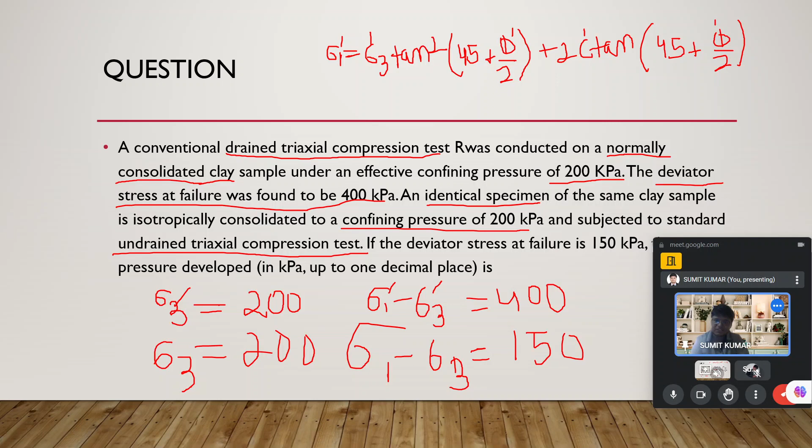In the meanwhile, I will first start with a quick introduction of the lecture we went across during the last session, and afterward we will start with the new content I have prepared for you. So in the last class, what we studied: we solved a problem based on the triaxial test, and it was a very good problem. We solved two problems, which you must have understood.

If anyone doesn't understand, you can ask me at the end, or maybe in the chat box. I will communicate at the end of this session.

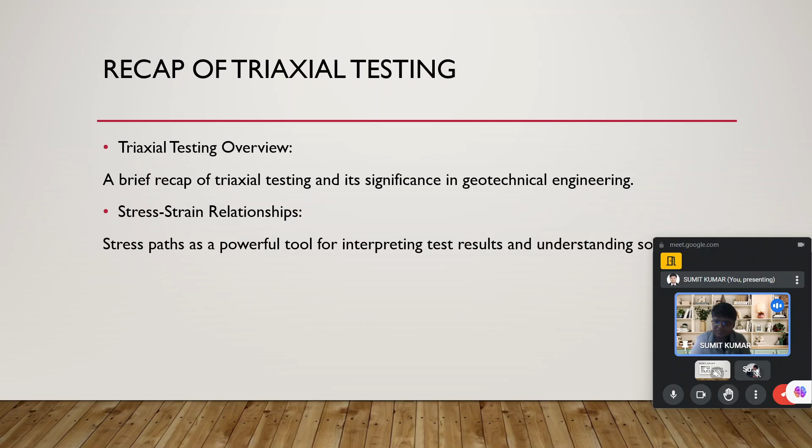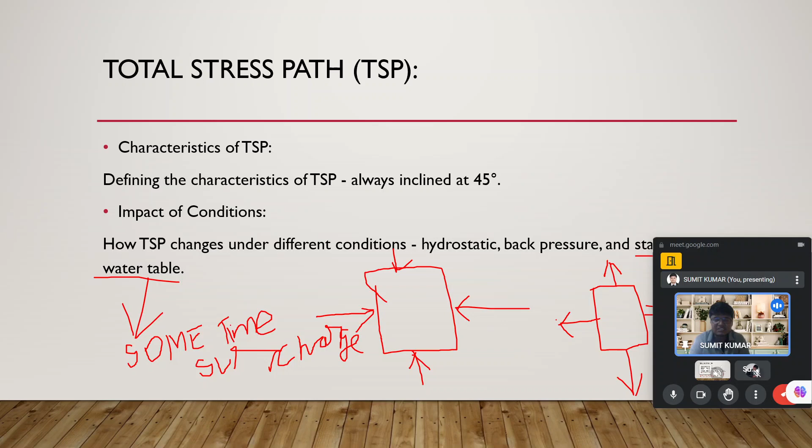So we have understood the total stress path, effective stress path, and what is meant by total stress minus static pore water pressure, and how we achieve those considerations, which we studied during the previous classes. Apart from that, we reviewed the triaxial test - a brief description of how the triaxial test is performed - which we also went across during the last session, along with the mathematical insights, like the interrelation between these factors which differentiate between the total stress and the effective stress path, taken into account during that session.

The nonlinear behavior of the effective stress path, and how it is connecting with the shear failure, by understanding the path that leads to the shear failure.

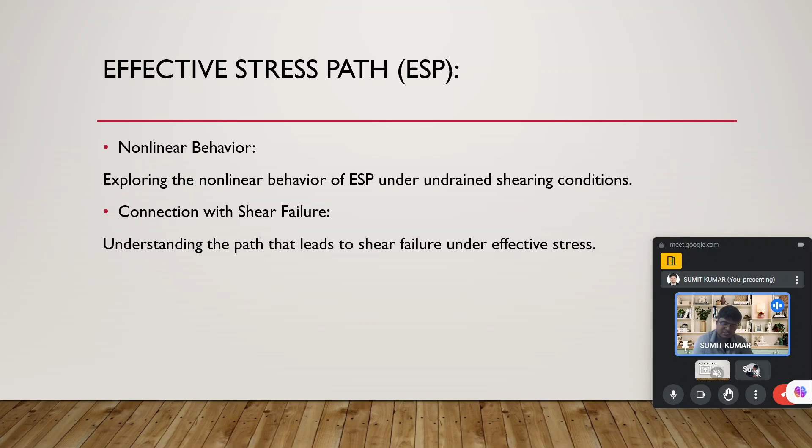During that session, we understood in a good manner how we plot the stress path PQ curve, what is meant by P and what is meant by Q. Q is sigma 1 minus sigma 3 by 2. Similarly, P is sigma 1 plus sigma 3 by 2.

Those understandings we have developed up to this extent, and their implementation will be seen in subsequent sections when we study the value of earth pressure at rest and earth pressure in different conditions. So those things we are going across in this and coming classes.

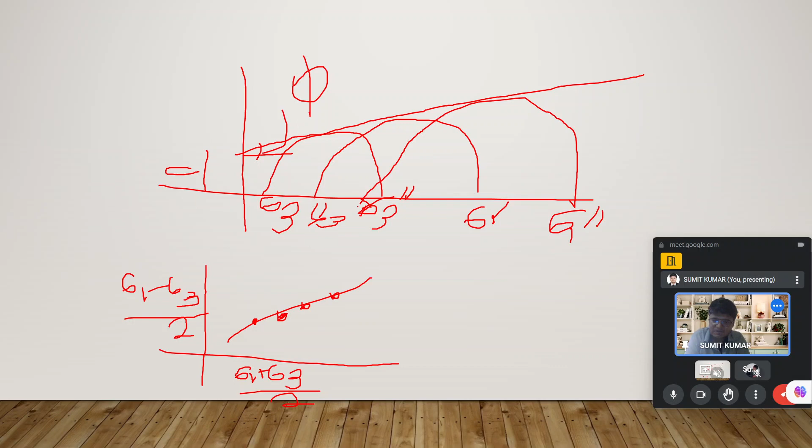So I will go ahead with this. During that session, we understood the stress path, we understood how the Mohr circle works, and how the stress path differentiates, which has been explained with the help of a diagram. The stress path consideration has also been represented for you.

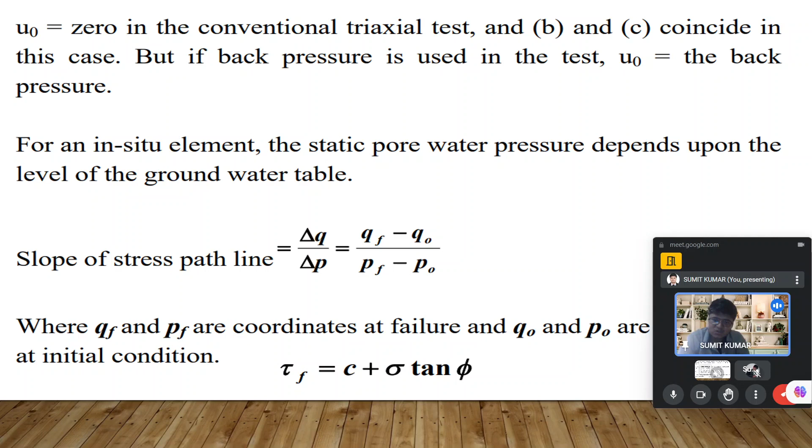Apart from that, the PQ curve and the value of P and Q has been discussed, and the total stress path, effective stress path, and the stress path coordinates, how we are able to find each, was also taken into account, along with delta Q by delta P and how the graph represents those sections.

Up to this we have understood in the last class, and at the end we saw some problems related to the PQ curve, like P is sigma 1 plus sigma 3 by 2, and Q is sigma 1 minus sigma 3 by 2. With the help of that, we solved the problem and identified the value of cohesion and angle of internal friction during that session.

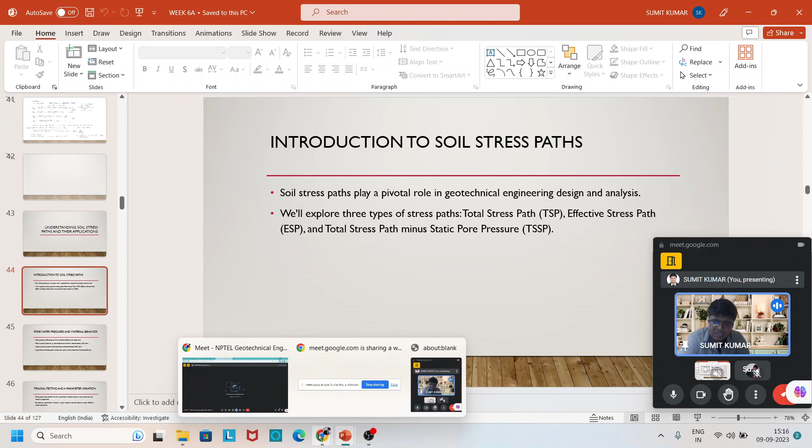Okay, so now what are we going to do? Now we are going to study the sections which are the prime concern for today, and that section is nothing but the earth pressure - active earth pressure, passive earth pressure, and earth pressure at rest condition. So those are the contents which we are primarily trying to discuss during this session.

So first of all, let's look at the earth pressure theory. When we go across the earth pressure, we come across it in day-to-day life - the active earth pressure theory, earth pressure at rest, earth pressure in active state, earth pressure in passive state. So what do we mean by earth pressure, and how does this earth pressure actually come into the picture? There is always a question in our mind.

When we see earth pressure, we see the log spiral, Coulomb, Rankine, and many more things. If you have a little idea regarding this, you must understand that these aspects we come across in our day-to-day interaction and activity. So how will we deal with that, and how could we understand the facts of active earth pressure, passive earth pressure, and earth pressure at rest condition?

So first of all, we start with the earth pressure at rest condition. We discuss every aspect in two different perspectives during this session, so you will get a better understanding of the topic as well as two revisions. First, I provide the same content in one representation with certain notations. Afterward, I will represent the same content in another representation with the same notation, so that will help you understand the topic and the problems framed due to earth pressure conditions.

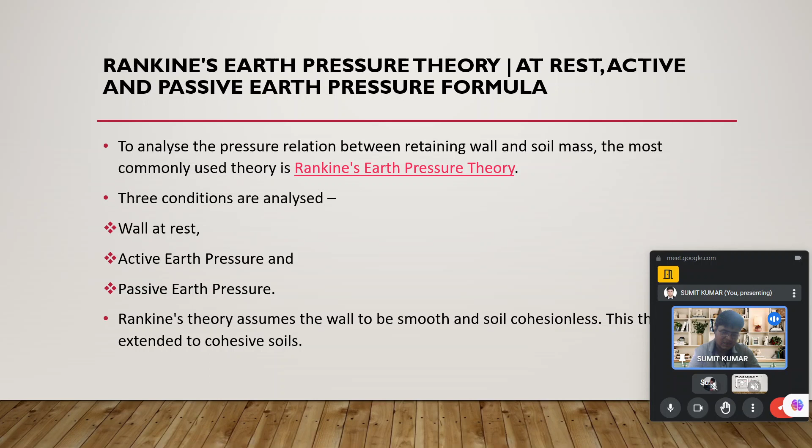So this wall which we are talking about is smooth, and when we move forward, if the wall hadn't been there, the soil mass could have come out, which implies the soil mass is applying some pressure on the wall. That is called the earth pressure. This is the basic thing you need to understand. If there is no wall, then the soil couldn't retain over there, so it acts as a retaining wall. If there is no wall, the soil gets collapsed at that point. Hence it must apply some pressure on that wall, and that pressure which has been applied by that soil mass, which is specifically the backfill, is creating some pressure on the wall, and that pressure is known as earth pressure.

Now we will move forward and take the consideration of earth pressure at rest, earth pressure in active state and passive state, and we will go in that direction. So we should design the retaining wall against the earth pressure.

Now look, this picture has been represented over there. The retaining wall has been shown, and the backfill has been also represented. Now imagine a situation: if this wall has not been created, is it possible in any way to hold the entire soil mass without it getting collapsed, the soil which has been present over there?

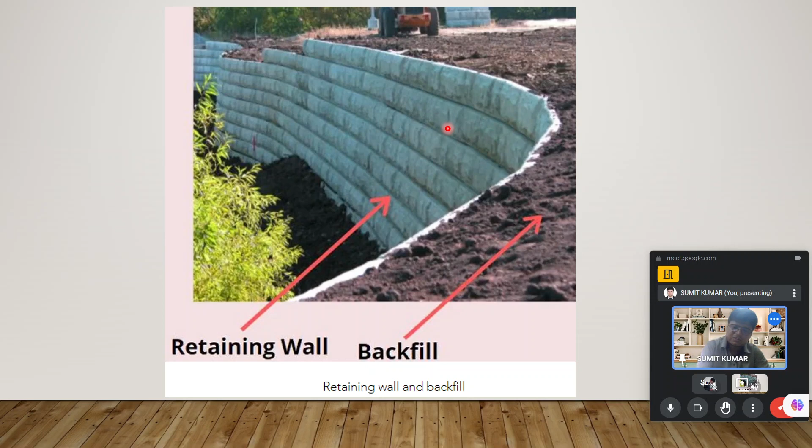Now we talk about the design of retaining wall. Basically design of retaining wall is not our consideration, but the types of load which have been acting on that is the matter of concern for some aspect of time, like the pressure has been acting in the active direction or the passive direction. Those aspects will be there, but we will deal with that in the meanwhile. First of all, we will go ahead with our consideration which we are looking at.

So while designing the retaining wall, some points must need to be kept in mind. What are those points? Water does not have shear strength, hence the stresses in the vertical and horizontal direction are the same. We already know water doesn't have strength in soil mechanics - if there is water, it is a problem, we have to deal with water. If there is no water, designing anything will not be difficult at any point. Whereas the soil has some shear strength and the horizontal stress is a function of vertical stress, so the design is said to be a very complex task in itself because the horizontal stress is a function of vertical stress and all types of stresses need to be taken into our consideration.

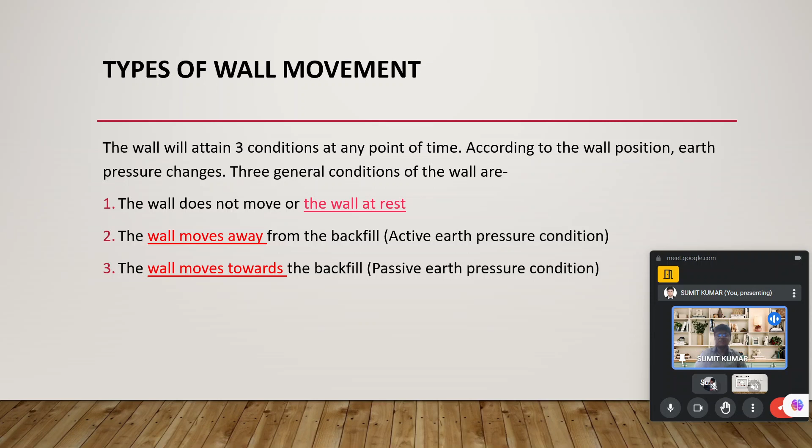But in the active earth pressure condition, the wall moves away. If the wall moves away from the backfill, the active earth pressure gets generated. Similarly, if the wall moves toward the backfill, the passive earth pressure condition is generated. These aspects lead to the conditions in which we could say this is the active state and this is the passive state.

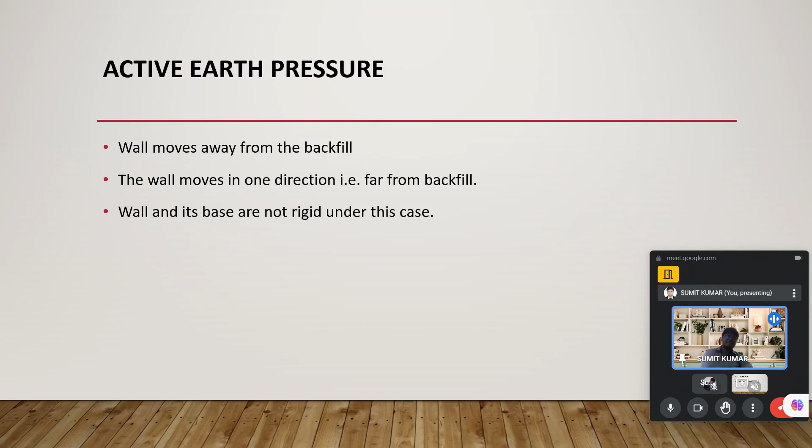Now we talk about the active earth pressure. When we talk about the active earth pressure, some conditions get clarified. The first condition is the wall moves away from the backfill. In active earth pressure, the movement of the wall takes place away from the backfill, which is why it has been called that active state. So the wall gets moved away from the backfill. Similarly, the wall moves in one direction, away from the backfill, and the wall and its base are not rigid under these conditions. So these are the conditions in the active state of stress.

Now you can see this picture. The active pressure condition has been represented here. Look at this picture and try to understand what is happening. In the meanwhile, give me a minute before I explain this. See this picture and try to understand, take in the basic aspects of this diagram. What did you understand by this?

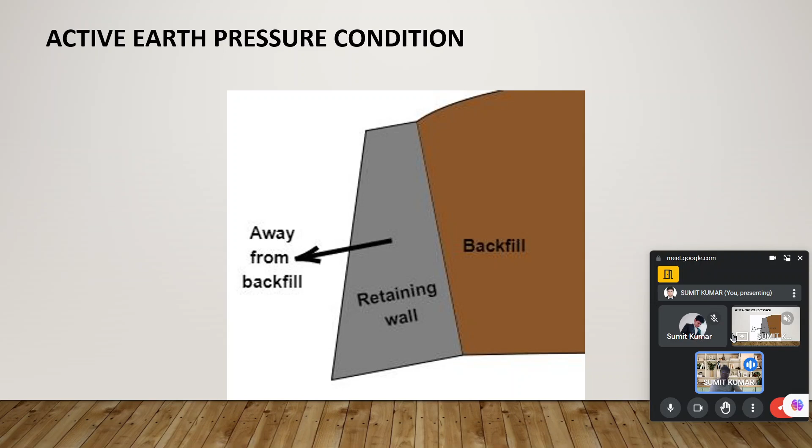So, when you look at this image, you see the backfill is there, the retaining wall is there, but in this case the retaining wall is tilted away from the backfill. In this condition, the wall moves away from the backfill, so this condition needs to be understood by one and all. This is the condition we are talking about, in which the earth pressure is in the active state. I think up to this point the thing is very clear, because the wall moves away from the backfill, and it has also been seen from this picture. Okay, so I will go ahead.

Now, some points about active earth pressure: as the wall moves away from the soil, some of the pressure of the soil gets relieved. Hence the shear resistance gets mobilized, and it is in opposition to the wall movement. This case is understood in that manner: the shear resistance is in the opposite direction, so the pressure in the horizontal direction gets reduced, and as the movement of the wall keeps moving away, there will be a condition where the full shear resistance gets mobilized.

After a point, there will not be any further resistance even if the wall moves away. So this horizontal pressure would be minimum, and it is called the active earth pressure because in this case the wall moves away. So the pressure acting on the wall is relatively less in quantity compared to what it would be in the natural condition. So in this condition, the earth pressure acting at that point of time will be minimum.

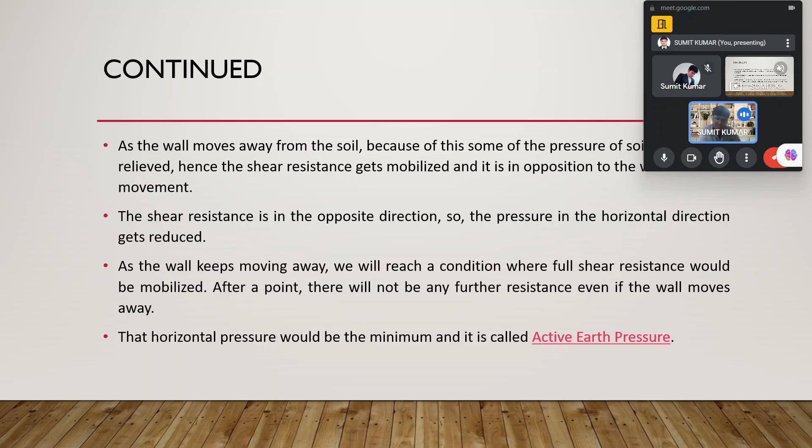Now we talk about the passive earth pressure. So we have gone across the active earth pressure basic understanding and the passive earth pressure basic understanding. Afterward we will discuss these things in another aspect. When we talk about this other aspect, what is that aspect I am talking about?

If you talk about the coefficient of earth pressure in the active and passive state, we already took a minute to answer that question. So there is no liberty to take the active and passive earth pressure in a converse way in any possible cases.

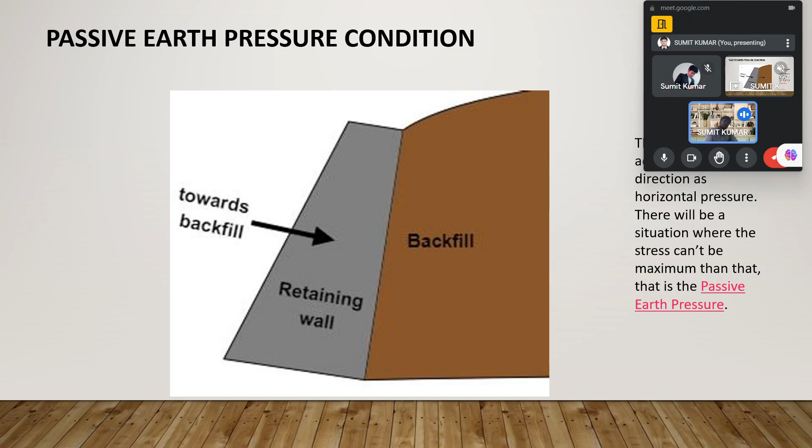We can see this with the help of a diagram, as we saw earlier. There, the wall is moved away, but in this case, toward the backfill, the retaining wall is going, so the passive earth pressure condition gets generated.

In this case, the shear stress acts in the same direction as the horizontal pressure. There will be a situation where the stress can't be maximum than that. Then that is the passive earth pressure in a real sense.

Up to this, everything is crystal clear. Now we talk about the Rankine pressure theory. We see some of the assumptions which have been proposed by Rankine.

The Rankine theory assumes that there is no wall friction, meaning the value of delta is zero, and the ground and failure surfaces are straight planes, and that the resultant forces act parallel to the

backfill slope. In the case of a retaining structure, the earth retained may be filled up with earth or natural soil, and this backfill material may exert a certain lateral pressure on the wall, and if the wall is rigid and does not move with the pressure exerted on the wall, behind the wall will be the state of elastic equilibrium.

These things need to be understood in the real sense, like what is happening when we talk about the earth pressure theory of Rankine. The backfill material may exert a certain lateral pressure on the wall, and if the wall is rigid and does not move with respect to the pressure exerted on the wall, behind the wall will be a state of elastic equilibrium. These points need to be understood.

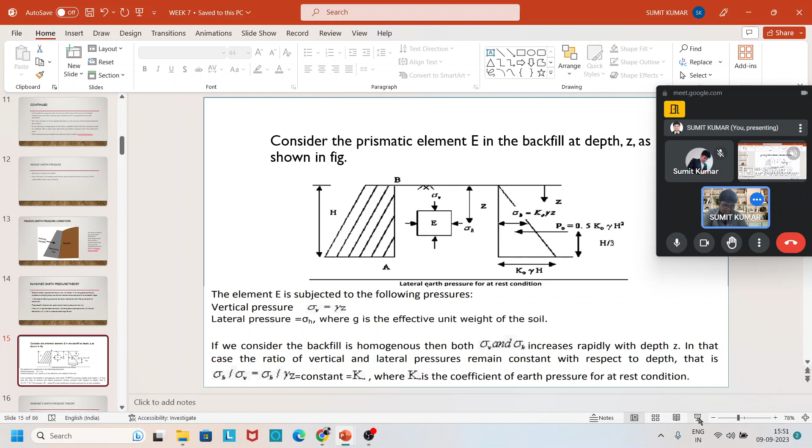Okay, I think this is clear. Now first of all, understand that when we talk about earth pressure, we draw the pressure diagram of soil up to the section where we want to find the earth pressure.

Afterward, we multiply that with the coefficient of earth pressure, either the rest condition coefficient, the active state coefficient, or the passive state coefficient. So we calculated sigma h equals K naught gamma z, and similarly we found the resultant earth pressure as 1 by 2 K naught gamma h square.

And we know this earth pressure diagram forms a triangular shape. The section on which this earth pressure acts is at the center of gravity of this triangle, that is h by 3 from the base and 2h by 3 from the top.

Now you need to understand, if cohesion is present, then the resultant earth pressure must be at some other location. So we need to calculate the position of earth pressure in those cases.

So two types of questions are framed here: either we have to find the earth pressure at a certain section, or in a second question we have to find the resultant earth pressure.

If we have to find the resultant earth pressure, we take the area of the earth pressure diagram multiplied by K, giving the value of earth pressure in kilonewton per meter. Similarly, for earth pressure at a certain section at depth z, that value will be in kilonewton per meter square.

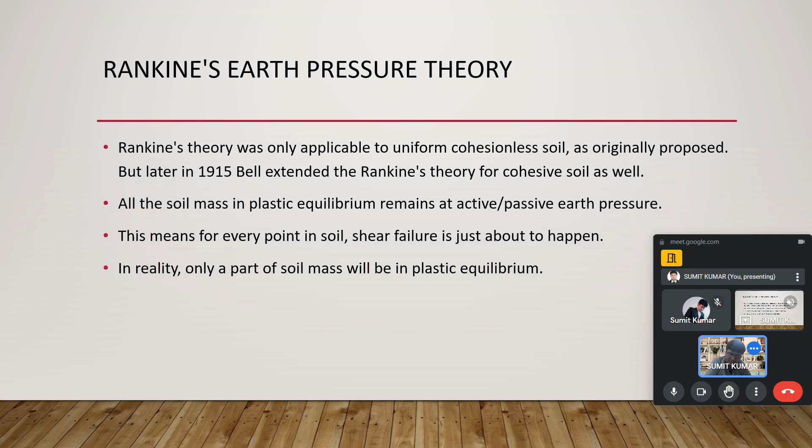Now we will see the assumptions taken into account in the Rankine earth pressure theory, and these assumptions are the limitations when we talk about Rankine earth pressure. In later classes we already read Coulomb theory, Coulomb wedge theory, Culmann theory. We must understand which theory has what assumptions, and whether those assumptions act as a great limitation in some way or another. These aspects need to be seen carefully.

Some important assumptions of the Rankine pressure theory: the soil is isotropic and homogeneous. This means the value of cohesion, angle of internal friction, and gamma have the same value everywhere, and they have the same value in all directions at every point. Because if this isn't the case, solving the specific problem or taking care of field considerations becomes very difficult in a real sense.

The strength of the vertical plane is the same as that of the horizontal plane. Note that this theory is also applicable for multi-layered soil. When we talk about multi-layered soil, in different layers the value of cohesion and gamma is not the same, it varies.

Based on the variation of phi, gamma, and C, we are able to calculate the value of stress at that section by applying Rankine's theory or Bell's theory, whichever is applicable for cohesionless or cohesive soil respectively. Here C is the value of cohesion, phi is the angle of internal friction, and gamma is the unit weight of the soil.

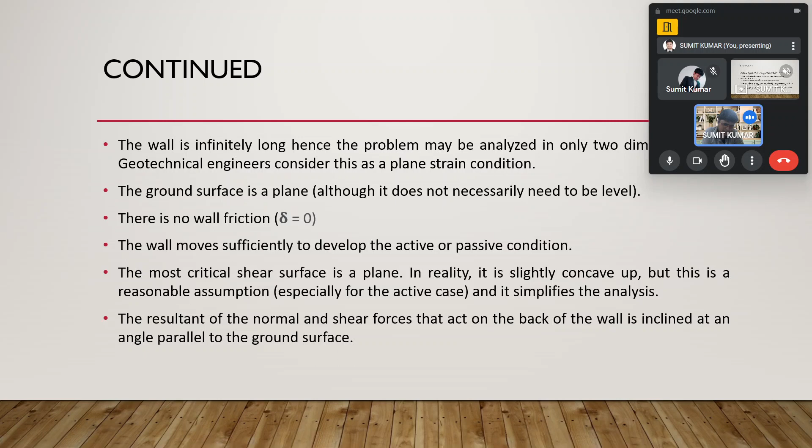The most critical shear surface, in reality, is a plane that is slightly concave up, but assuming it as a plane is reasonable, especially for active cases, and it simplifies the analysis. The resultant of the normal and shear force acting on the back of the wall is inclined at an angle parallel to the ground surface.

Now we again look at the Rankine earth pressure at rest condition in some detail. Earlier we drew an interface going up to depth Z, and on that section we calculate the value of earth pressure at rest condition. Now we are developing our concept, going to find the value of K naught, and how earth pressure at rest is calculated in the real sense. We are going to discuss these considerations now.

I think these points are more or less clear. So, this theory of elasticity is used here.

Here there is zero displacement, so zero strain, and the soil is homogeneous, isotropic, and semi-infinite. The elastic modulus and Poisson ratio are constant for the total soil mass, and the coefficient of earth pressure at rest condition is denoted by K naught, defined by the ratio of lateral earth pressure to vertical earth pressure.

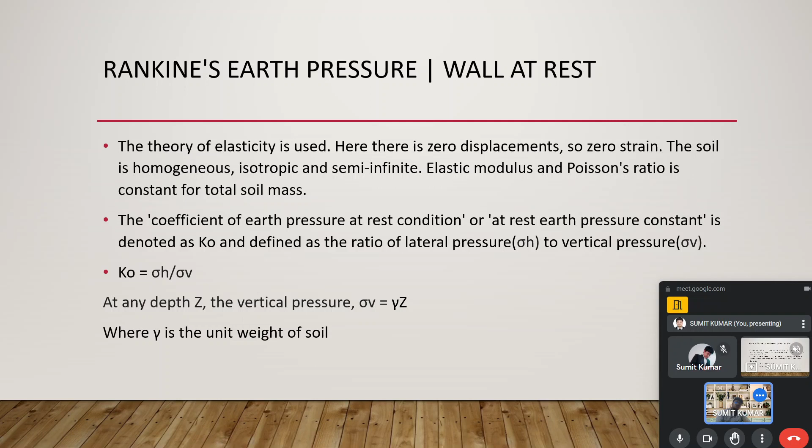This has already been discussed in a different consideration in previous slides, where at any depth z the vertical pressure sigma v is gamma z, multiplied by the value of K naught, which is the constant parameter for the specific soil at a certain depth, where gamma is the unit weight of the soil.

Now, the coefficient of earth pressure at rest has been defined in terms of Poisson ratio, and that relation is K naught equal to mu by 1 minus mu, and by this we are able to find the solution of the problem which has been given.

Now, when we calculate the earth pressure at rest condition, the coefficient K naught is applicable for determining the active pressure in clay for the strutted system. Because of the cohesive property of clay, there will be no lateral pressure exerted at rest condition up to some height at the time excavation is made.

However, with time, the creep and swelling of the clay will occur and a lateral pressure will develop. The coefficient takes the characteristics of the clay into account and will always give a positive lateral earth pressure.

The lateral earth pressure acting on the wall of height h may be expressed as K naught gamma h, and the total earth pressure of the soil at rest condition is given as 0.5 K naught gamma h square. We have seen this with the help of a symmetric diagram as well.

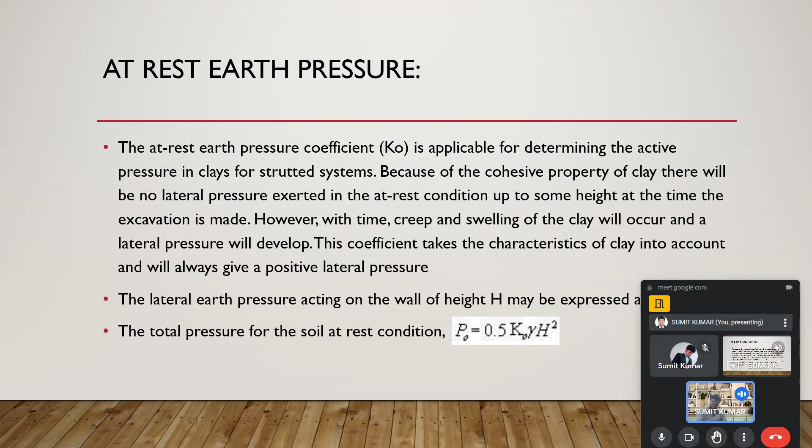Over here we again go across those aspects to develop our understanding in a better manner. So I think up to this point things are more or less clear.

Now we will see the different values K0 could achieve when we are talking about the rest condition. The value of K0 depends upon the relative density of the sand, and the process by which the deposit was formed.

So in this process, if it does not involve artificial tamping, the value ranges from 0.4 for loose sand to 0.6 for dense sand, and tamping of layers may increase this value.

Up to 0.8, and from the elastic theory K naught equals mu by 1 minus mu, where mu is the Poisson ratio. According to Jaky in 1944, a good approximation of K naught is given by K naught equals 1 minus sine phi.

So those points need to be understood, and these considerations need to be understood by us in a better manner in order to deal with the problem related to this section.

Now over here you can see for saturated clay, unsaturated clay, sandy clay, silty soil, dense sand, coarse sand, fine grained soil, and rock, the value of Poisson ratio has been stated, and with the help of Poisson ratio we are able to find the coefficient of earth pressure at rest.

That is the value of K naught, which has different values depending upon the value of Poisson ratio for different types of soil mass. So these relations are just for your understanding.

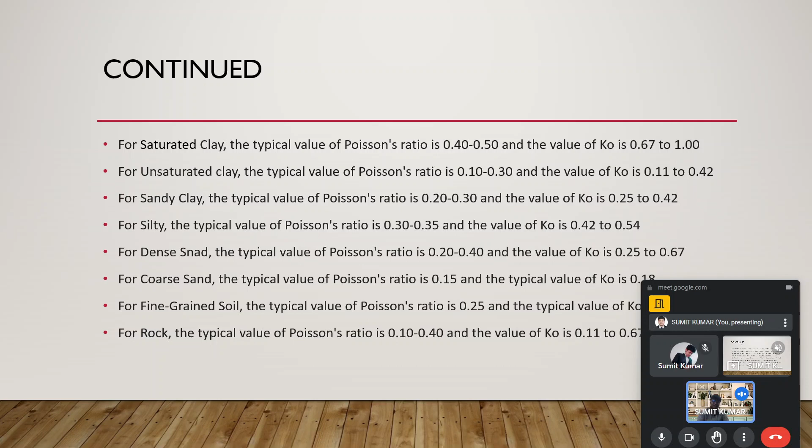Over there, we use this case only. Now, this is not the only case, as we don't always have normally consolidated soil. There may be different types of soil, maybe over-consolidated.

So how are we able to find the value of K naught for different types of soil? A researcher named Jaky in 1944 gave a good approximation for K naught as 1 minus sine phi, where phi is the angle of internal friction. This is widely used because you rarely see the value of Poisson's ratio used while calculating, and this consideration helps reduce our working process in solving the problem. We don't need to calculate Poisson's ratio since the angle of internal friction is already stated in some way or other.

So for normally consolidated clay, K naught has also been written as 0.19 plus 0.233 log IP, where IP is the plasticity index. So if at some point the plasticity index is stated and you have to find the value of K naught for normally consolidated soil, you are able to find it with the help of this interrelation. Another interrelation is for over-consolidated clay, where the value of K naught is given as K naught in the normally consolidated state multiplied by the over-consolidation ratio.

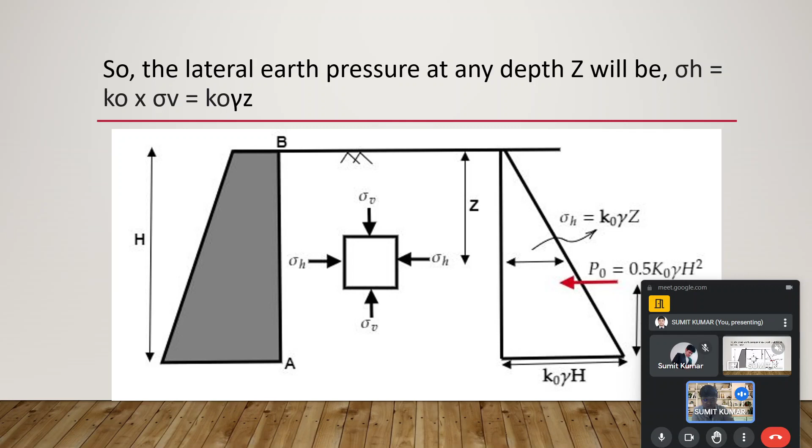Over here the same thing has been written: the resultant pressure at rest acts at a height h by 3 from the bottom of the pressure, denoted by P naught, and P naught is the area of the triangular pressure diagram. So P naught equals 1 by 2 h into K naught gamma h, that is 0.5 K naught gamma h square. Okay, so we will go ahead.

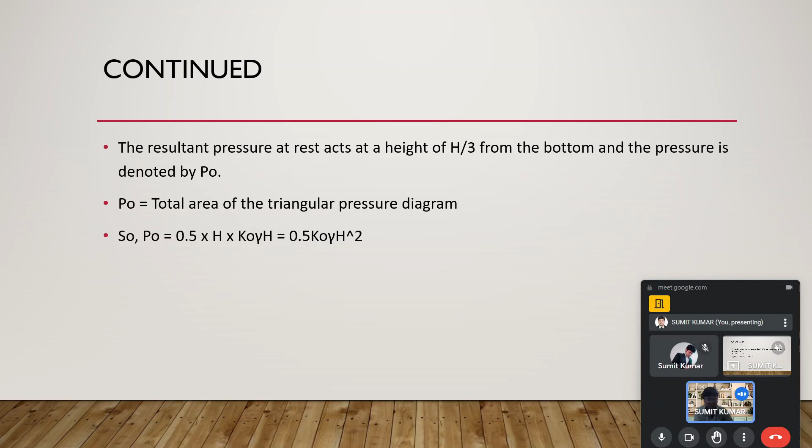Now we will look at the active earth pressure condition. We already know the active and passive earth pressure conditions are the two conditions. In the first condition, active earth pressure, the wall moves away from the backfill. In the second condition, the retaining wall moves toward the backfill. In both cases, we have understood the basic concepts.

Now we are going to develop the value of the coefficient of earth pressure in the active state and the coefficient of earth pressure in the passive state respectively. To understand these values and aspects, we also come to know why the value of K naught and the coefficient of earth pressure in the active state is always less than in the passive state. What are the factors working during our study of earth pressure? So we are going in that direction only.

Okay, so we will start with this.

Active earth pressure condition, we have to go a little faster in order to complete the entire content for today's session.

No problem, I will look into that. All the problems will be solved in the given duration of time. Okay, because I have kept almost 15 problems, approximately 15 to 20 small problems at the end of the session, so you will get better practice of the things we are discussing.

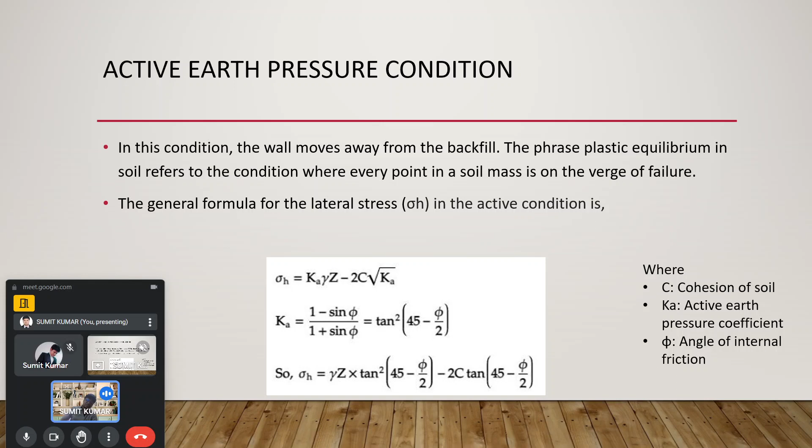The value of K, the coefficient of earth pressure in the active state, is 1 minus sine phi by 1 plus sine phi, which is also written as tan square of 45 minus phi by 2, or equivalently cot square of 45 plus phi by 2. So our relation becomes gamma z into tan square 45 minus phi by 2, minus 2c root k, using tan of 45 minus phi by 2. Here c is the cohesion of soil, k is the active earth pressure coefficient, and phi is the angle of internal friction. Up to this, things are very much clear.

Now when we plot the pressure diagram for cohesive soil, specifically the earth pressure diagram, the term minus 2c root k is clearly represented because at depth z equal to 0, our relation is sigma h equal to k gamma z minus 2c root k. I'll write this so it is understood in a better manner.

At z equal to 0, the expression for lateral earth pressure becomes sigma h equal to minus 2c root k. Up to this, things are very much clear.

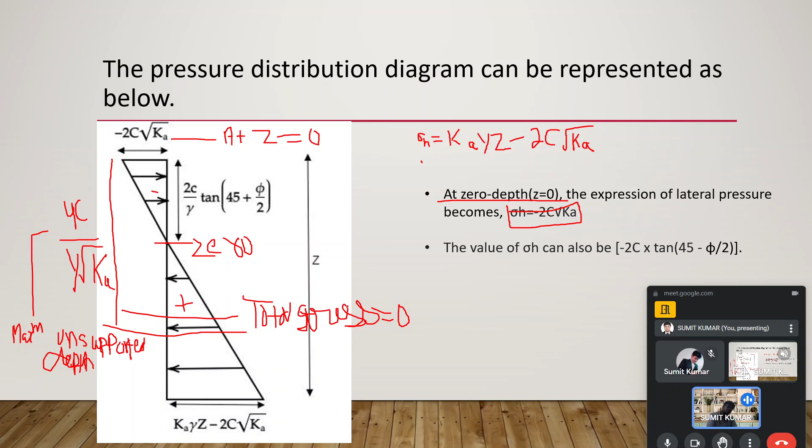Things will be very much clear at this point. The value of sigma h is minus 2c into tan of 45 minus phi by 2, as represented here. Now, for cohesive soil we have seen this.

Now we are talking about cohesionless soil. For cohesionless soil, we already know sigma h is k into gamma z. The value of k is known as 1 minus sin phi by 1 plus sin phi, which equals tan square of 45 minus phi by 2. So sigma h equals gamma z into tan square 45 minus phi by 2. This understanding is very clear.

In this case, the negative side of pressure distribution doesn't create an effect. The value has been drawn as the earth pressure only, and at z equal to 0, sigma h will be 0 because k gamma z minus 2c root k, and at z equal to 0, the sigma h becomes 0 since the 2c root k doesn't add because the c value is 0. So the pressure distribution starts from the origin and will be drawn in a similar manner.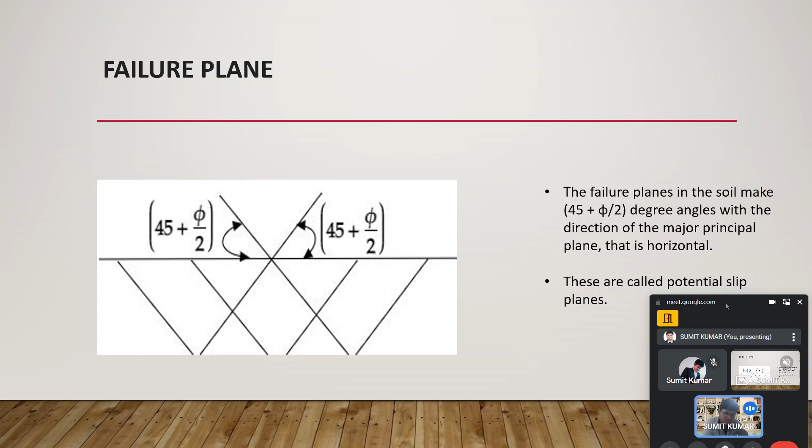Now we talk about the failure plane. The failure plane in the soil makes a 45 plus phi by 2 degree angle with the direction of the major principal plane, which is the horizontal plane when we talk about the active state, and this is called the potential slip plane. This needs to be understood.

Now we again take the same consideration, as we've said we study everything two times so our mind grasps those concepts better and sustains them for longer. The same thing has been mentioned over there, the active state of stress.

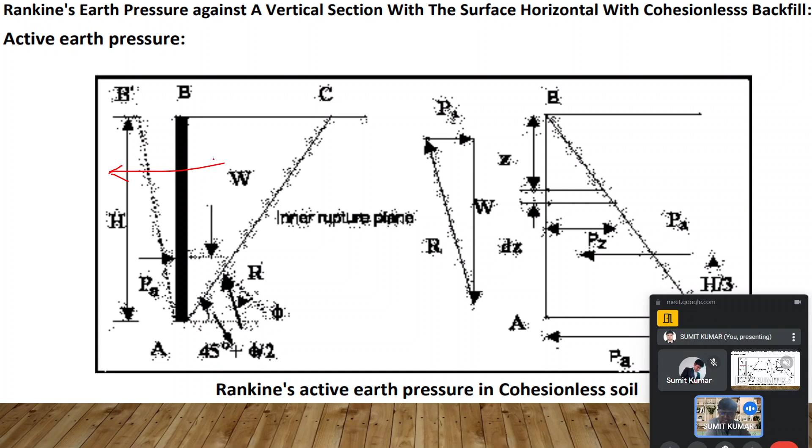This diagram wasn't there earlier, so here you can see the inner rupture planes and how the pressure has been acting in the active state when the wall is moving away from the backfill. You can see over here the wall is moving away from the backfill. So how the stress gets developed, these things have been represented again and again for you.

The things which have been written, I will read again and add some points for the audience present here. So the lateral earth pressure acting against a smooth wall AB is due to the mass of the soil ABC above the rupture plane, as seen in the last picture in the last slide.

So the lateral pressure acting against the horizontal, and the lateral pressure distribution on wall AB, which makes an angle of 45 degree plus phi by 2, increases with height h in the same proportion to the depth, and the pressure acts normal to the wall AB. So the lateral active earth pressure at A will be Pa equal to K gamma h, which acts at a distance h by 3 from the base, as we have discussed at several points of time.

If we are concerned about getting the value of total stress, we write the equation for Pz as K into gamma z, and we integrate from depth 0 to h, and on that basis we are able to find the total stress acting at that point, which will be 1 by 2 K gamma h square. And over there the K is the value of tan square of 45 minus phi by 2, I think so.

And otherwise, the better way is to write K as 1 minus sin phi divided by 1 plus sin phi.

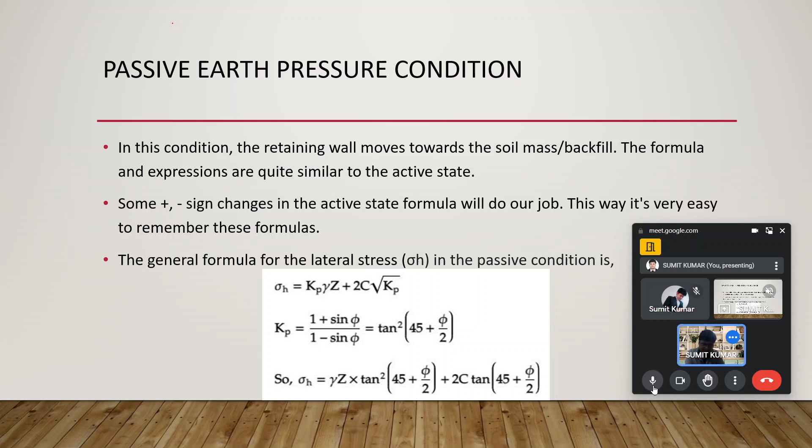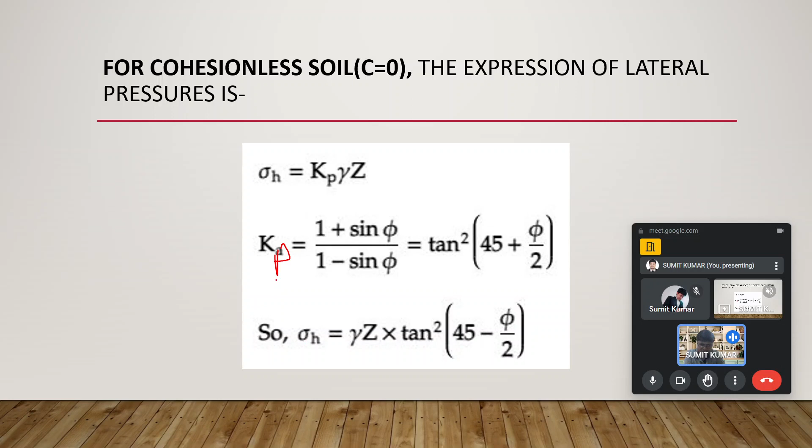A correction is needed here - this is Kp. Rest of things is okay: 1 plus sin phi by 1 minus sin phi times tan 45 plus phi.

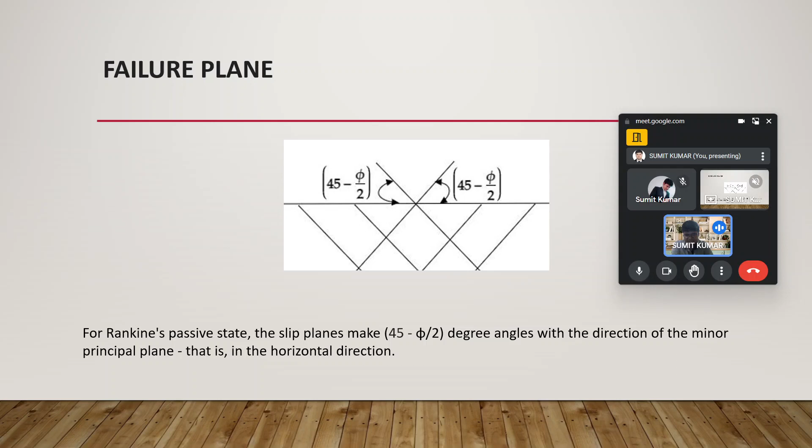So the failure plane, similarly as we have seen in the active state of stress, for the passive state of stress, for the Rankine passive state of stress, makes an angle 45 minus phi by 2 as shown over here with the horizontal. So it makes a 45 minus phi by 2 degree angle with the direction of the minor principal plane. In this case, the minor principal plane will be the plane represented, that is the horizontal direction.

Now we will take some points of the Rankine passive earth pressure condition. In the cohesionless case, if the wall AB is pushed into the mass to such an extent as to impart uniform compression throughout the soil mass, the soil wedge ABC in the figure will be in the Rankine passive state of plastic equilibrium, and the inner rupture plane AC makes an angle 45 plus phi by 2 with the vertical AB, and the pressure distribution on the wall is linear as shown in the previous diagram only.

And the lateral passive earth pressure at A is P equal to Kp gamma H, which acts at height h by 3 above the base of the wall, because it takes place in a similar way. Up to this point, there will be no problem calculating the stress.

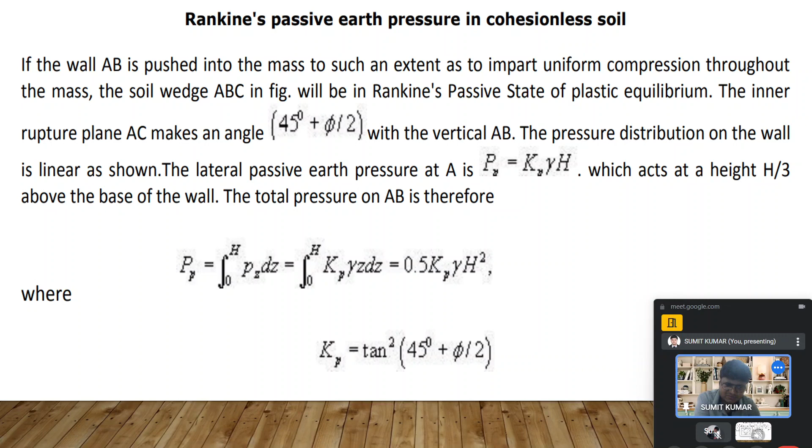So the total pressure, again, as we have calculated the total stress by integrating the whole section from 0 to h, in a similar way over here as well we are going to integrate from 0 to h, and we will finally consider our solution in a true sense. So over here as well, the value of Kp has been represented, and hence our answer has been found.

So up to this we have solved the Rankine theory. Afterward, some more points in the Rankine theory have been left, that is the surcharge and how the surcharge helps.

There will be some questions asking how much surcharge we have to keep on the soil in order to reduce the chances of development of negative state of stress in cohesive soil. Those points will be covered in the next lecture. In this lecture, we will cover Rankine theory up to this extent due to time constraints, and we will move to that section in coming sessions. So up to this point there should be no confusion. Now we will move ahead and see the Coulomb wedge theory.

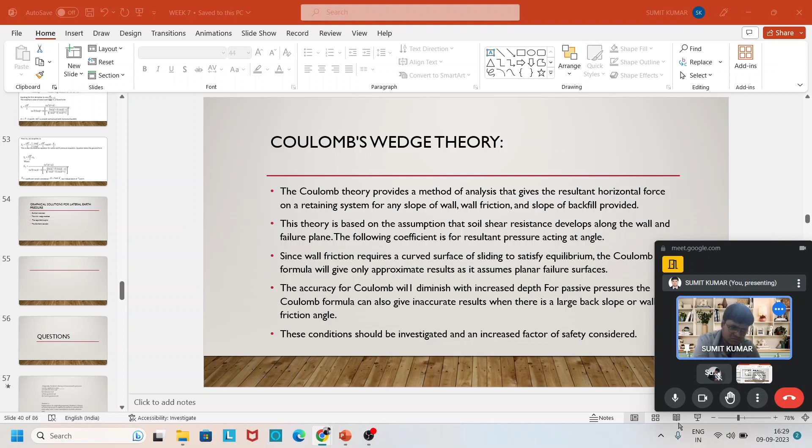So the Coulomb wedge theory. When we talk about the Coulomb wedge theory, in the first slide only you have seen several diagrams representing these things. So now we come to that section.

So the Coulomb wedge theory - what do we mean by it? The Coulomb theory provides a method of analysis that gives a resultant horizontal force on the retaining system for any slope of wall friction and slope of backfill provided. This theory is based on the assumption that shear resistance is developed along the wall and the failure plane, and the resultant pressure acts at an angle. Since wall friction requires a curved surface of sliding to satisfy equilibrium, the Coulomb formula gives only approximate results as it assumes planar failure surfaces.

The accuracy of the Coulomb formula diminishes with increased depth for the passive pressure case. The Coulomb formula can also give inaccurate results when there is a large back slope or wall friction angle. So these conditions should be investigated and an increased factor of safety considered.

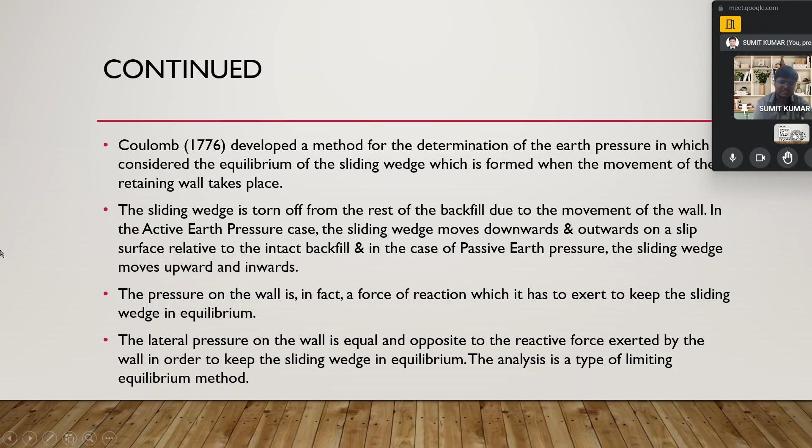So the set of assumptions made during this Coulomb wedge theory are very much important, as these assumptions are sometimes directly asked. The backfill is dry, cohesionless, homogeneous, isotropic, an ideally plastic material, elastically undeformable but breakable. The slip surface is a plane surface that passes through the heel of the wall. The wall surface is rough. The resultant earth pressure on the wall is inclined at an angle to the normal to the wall, where the angle is the angle of friction between the wall and the backfill.

These assumptions are very important because sometimes in many examinations the questions come directly from the assumptions. In several competitive exams as well, questions have been developed with the help of these assumptions, and if you have no idea about them, you have no clue how to solve. But if you have developed understanding about the assumptions, you are easily able to solve it.

So the sliding wedge itself acts as a rigid body, and the value of earth pressure is obtained by considering the limiting equilibrium of the sliding wedge as a whole. The position and direction of the resultant earth pressure are known, and the resultant pressure acts on the back of the wall at one-third height of the wall from the base and is inclined at an angle to the normal to the back. This angle is called the angle of wall friction. The back of the wall is rough, and relative movement of the wall and soil at the back develops the frictional force that influences the magnitude and direction of the resultant pressure.

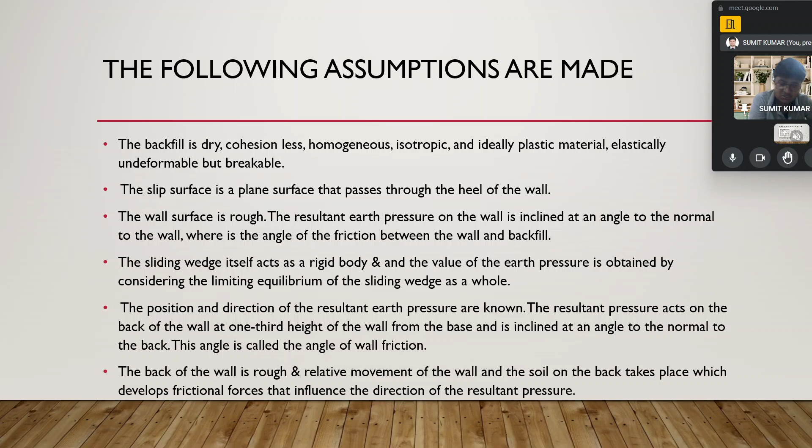These things are assumptions. In the Coulomb theory, only plane failure is assumed, and the lateral force required to maintain the equilibrium of the wedge is found using the principle of statics. The procedure is repeated for several trial surfaces, because in the Coulomb wedge theory, the trial surface which gives the largest force for the active case, and the smallest force for the passive case, is the actual failure surface.

This method readily accommodates the friction between the wall and the backfill, irregular backfill, sloping wall, and surcharge loading, etc. Although initially the theory was for dry, cohesionless soil, it has now been extended to wet soil and cohesive soil as well.

As we have seen, the Rankine theory takes place in a similar manner. There, the theory has been modified to obtain results for cohesive soil. So the Coulomb theory is more general than the Rankine theory.

Now, the Coulomb active pressure in cohesionless soil - the figure given below shows the retaining wall with an inclined back face and sloping dry granular backfill. In the active case, the sliding wedge ABD moves downward and the reaction R acts upward, inclined at angle phi dash to the normal. The sliding wedge ABD is in equilibrium under three forces.

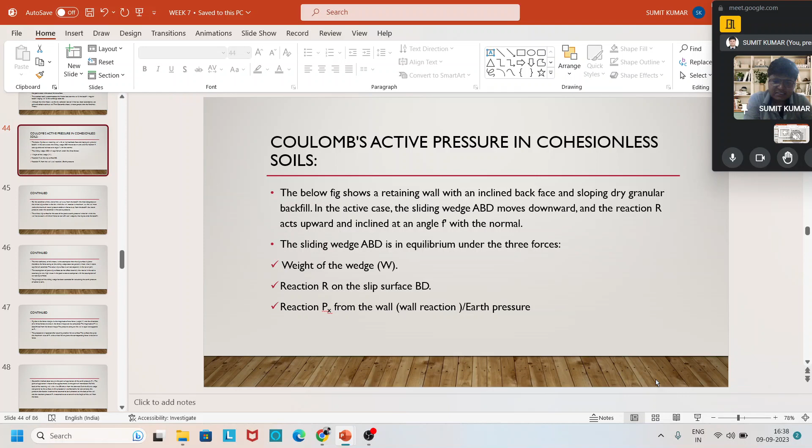The forces which are there are the weight of the wedge, the reaction R on the slip surface BD, and the reaction PA from the wall reaction on the back of the wall.

So for the condition of yield of the wall away from the backfill, the most dangerous or critical slip surface is that for which the wall reaction is maximum, meaning the wall must resist the maximum lateral pressure before it moves away from the backfill. The lateral earth pressure under this condition is the active pressure.

The critical slip surface for the case of passive earth pressure is that for which the wall has to exert a minimum force to tear off the soil wedge by moving toward the backfill.

Now the main deficiency of the theory comes from the assumptions taken - the limitation arises from the assumption that the slip surface is planar. Therefore, the forces acting on the sliding wedge do not generally meet under static equilibrium condition.

The actual slip surface is curved, especially for the lower part, and the assumption of a plane slip surface does not materially affect the resultant in the active case, but gives a very high value in the passive case as compared with the assumption of a curved slip surface, so overestimation and underestimation effects come into the picture.

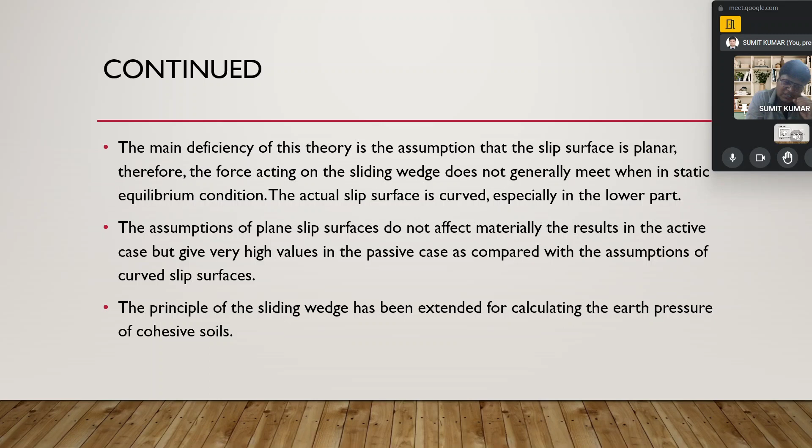Now for the figure given, the force triangle represents W, PA, and everything. Since the magnitude of one force, the weight, is known and only has a direction, and all three forces have known directions, the force triangle can be completed and the magnitude of PA is determined from the force triangle. The pressure acting on the wall is equal and opposite to PA.

The procedure is repeated after assuming another failure surface, and the surface that gives the maximum value of PA is the critical failure plane. The corresponding force is the active force, so we go with that one.

Now, the Coulomb method does not give the point of application of the earth pressure specifically - basically it doesn't talk about that. When we talk about the Rankine theory, we say it acts at h by 3 from the base, or different considerations for different cases. But in the Coulomb theory, it doesn't say the force acts at this specific point. The point of application is found approximately at the point of intersection E of the wedge, approximately at the back of the retaining wall, with a line drawn from the centroid C of the failure wedge, parallel to the surface.

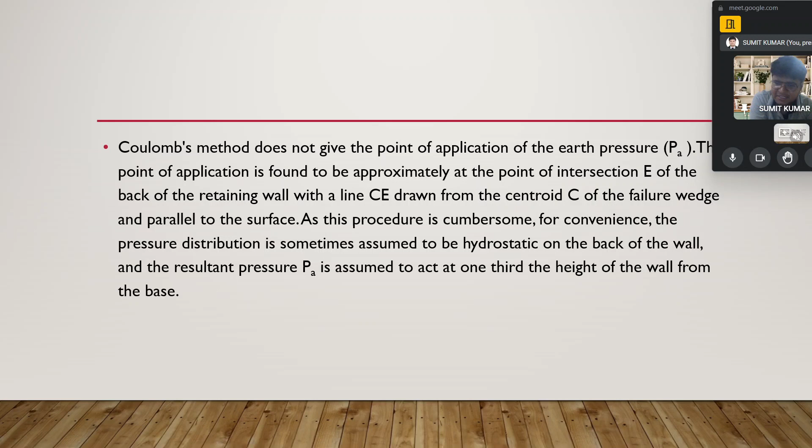As the procedure is cumbersome for convenience, the pressure distribution is sometimes assumed to be hydrostatic on the back of the wall, and the resultant pressure PA is assumed to act at one third of the wall height from the base. So in this way, the Coulomb theory works.

Now the following are some points that should be carefully noted while using the Coulomb theory, because before using any theory you need to understand its pros and cons. So some of the points we need to take care of before using this theory - we need to rectify the problems which have been created because of those aspects, and go across those considerations.

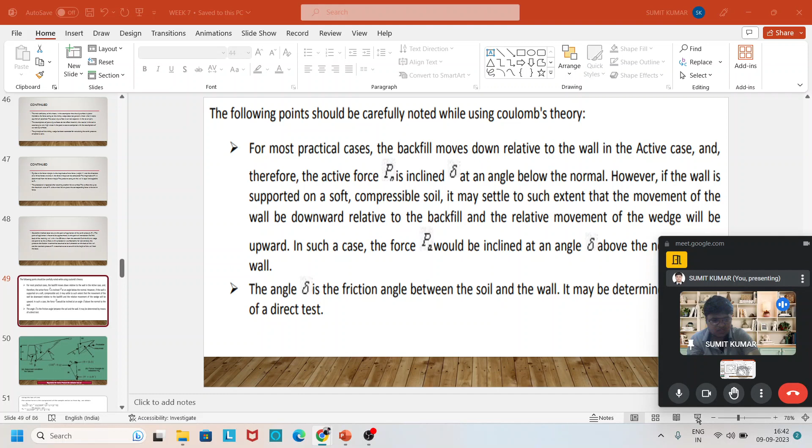Now the points are: for most practical cases the backfill moves downward relative to the wall in the active cases, and therefore the active force PA is inclined at an angle delta below the normal. However, if the wall is supported on soft compressible soil, it may settle too much, to such an extent that the movement of the wall will be downward relative to the backfill, and the relative movement of the wedge will be upward.

In such cases, the PA would be inclined at an angle delta above the normal of the wall, and delta is the friction angle between the soil and the wall, and it may be determined by means of a direct test.

Okay, so initially we are talking about the W. The W has been shown, the R has been shown, the PA has been shown. We are talking about this only. After that slide, you can go with this, and what we have discussed you will easily understand.

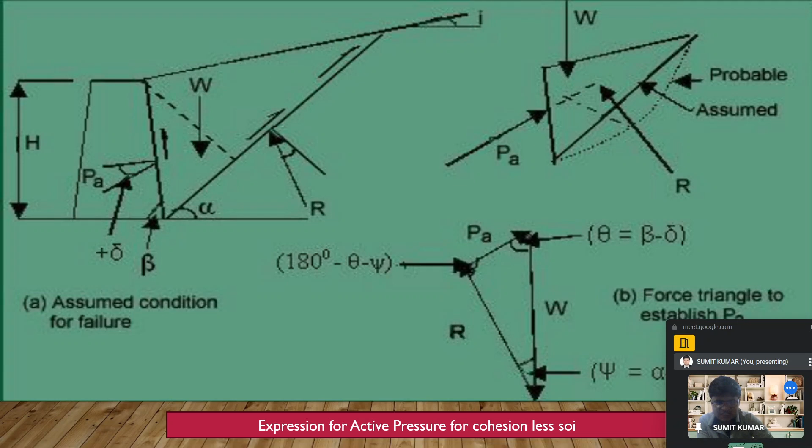So this is the expression of the active pressure for cohesionless soil which has been shown over here. Now we have taken this as a base and we try to frame the interrelation in which we are able to find the weight of the soil. Because if you take the area and the unit length depth beside, and multiply by the value of gamma, we are able to find the weight of the soil wedge.

Okay, so now when we use the sine law from the previous diagram, the active force component of the weight vector has been shown from the figure above. PA as sine of alpha minus phi dash, as W by this, and from solving we take the different angle inclinations. We are able to calculate the value of AB, now we are able to calculate the value of W. Similarly, we are able to find the value of PA, delta and beta. So the K value has been calculated.

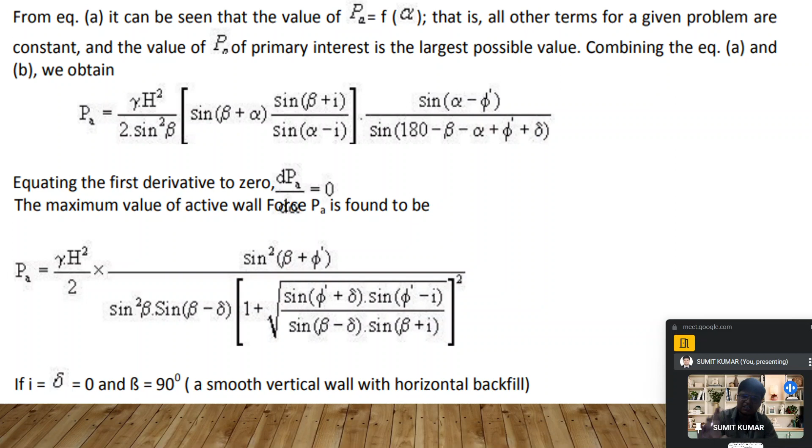So these extra things need not to be remembered, just go across them because there is a limitation of time. Maybe I will discuss this again in the next class. You don't need to remember these extra concepts at this point in time, this is only for understanding purposes.

Now I will go with the problems because I have taken many problems over here, so I don't want to miss those before going. Okay, some of the graphical methods are there for lateral earth pressure - that is the Culmann solution, trial wedge method, logarithmic spiral, and the Culmann solution. We will go about that to a little, very little extent in coming classes.

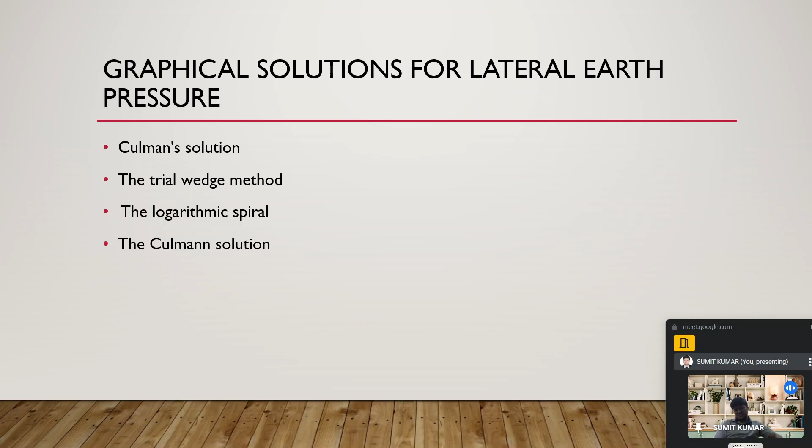And before that, moving ahead, we will go with some questions. So the questions become very important in this discussion. We will discuss very small problems first, afterward we will take some good problems in the next class only, not from the next class. So you will be able to understand the problem solving strategy, how to solve problems developed on these topics.

Okay, so the first question is like: the Rankine theory for lateral earth pressure can be applicable only to... So from the initial we have understood the Rankine theory, then the Rankine theory is modified by Bell. So the answer for this problem needs to be very clear in your mind - this theory is applicable for cohesionless soil only, because for cohesive soil this has been modified by Bell. So when asked whether the Rankine theory is applicable for lateral earth pressure calculation in cohesive soil, you say no.

So, in addition, you add your explanation - you say this has been proposed by Bell, which extended the Rankine theory in order to apply it to cohesive soil. So you can state the solution. These things need to be understood and very crystal clear in your mind. Okay, so that solution has been repeated.

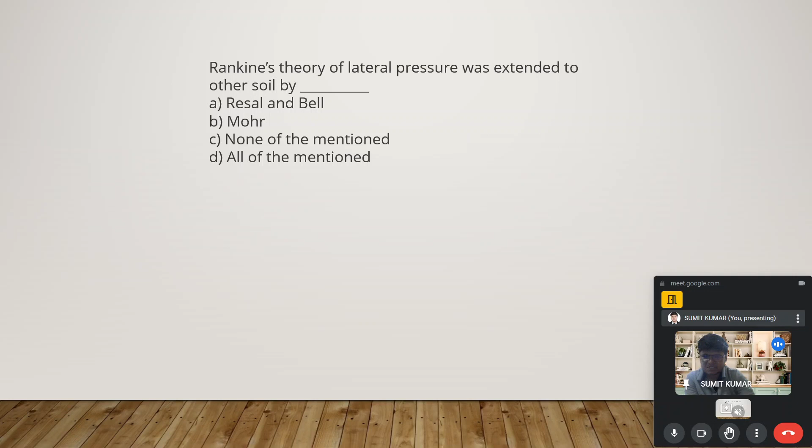The explanation tells us the theory of lateral earth pressure was extended to cohesive, stratified, and partially immersed and submerged soil by Resal in 1910 and by Bell in 1915. But we are mostly concerned about Bell's theory because we already used that modification in solving problems and implementing the real field situation in the actual manner.

Now the next question is based on the assumption of Rankine theory: the soil mass is stratified, submerged, homogeneous, or all of the above mentioned. So what are the assumptions? Whether the soil mass is stratified, submerged, homogeneous, or all of them. In my view, the solution for this question is C.

They never say this theory is applicable for stratified soil only, neither have they told that it should be in submerged conditions. So homogeneous and isotropic is the only assumption taken by Rankine for proposing his theory. The explanation is: according to the assumption of Rankine theory, the soil mass is semi-infinite, homogeneous, dry, and cohesionless. So this will be very much clear from this problem.

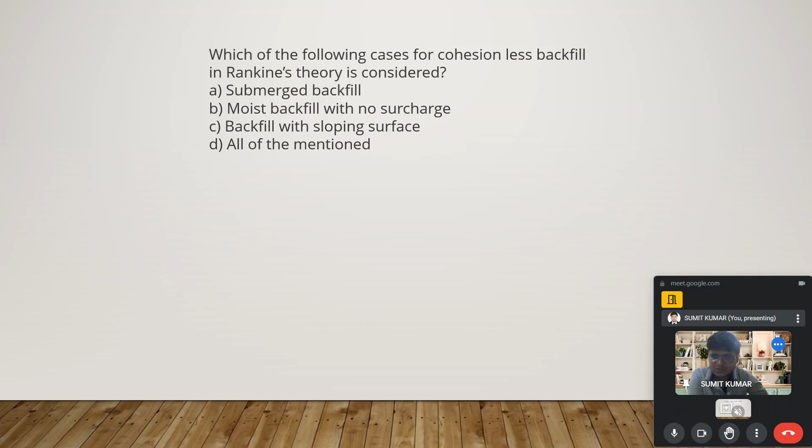Now, which of the following cases of cohesionless backfill in the Rankine theory is considered? Our options are submerged backfill, moist backfill with no surcharge, backfill with sloping surface, or all of the above. Read the question again: which of the following cases of cohesionless backfill in Rankine theory is considered - submerged backfill, moist backfill with no surcharge, backfill with sloping surface, or all of the above. In my point of view, the answer will be D, all of the above.

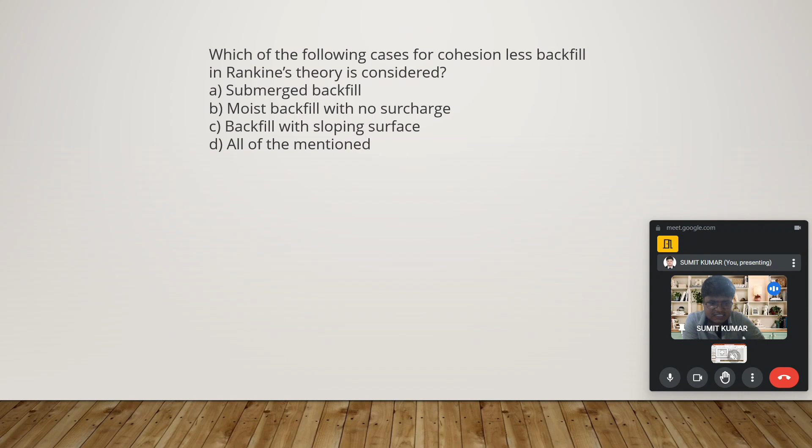Read the explanation for this before moving ahead. The explanation tells us that in Rankine theory, the following cases of cohesionless backfill are considered: dry or moist backfill with no surcharge, submerged backfill, backfill with sloping surface, and inclined back with surcharge. So this will be very clear in everyone's mind.

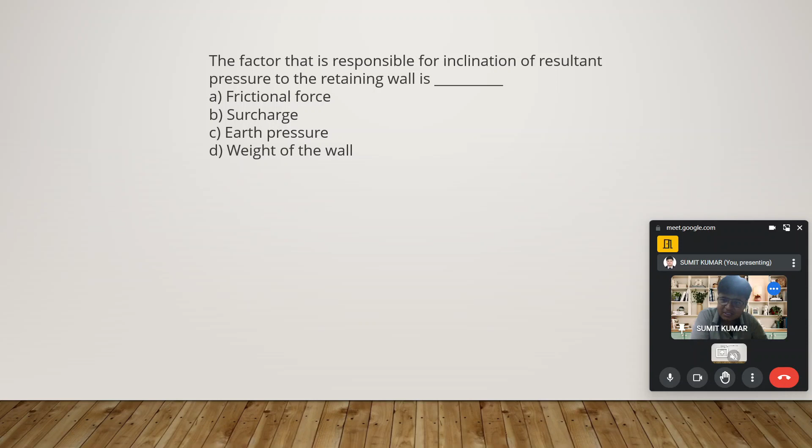Now, the factor that is responsible for the inclination of the resultant pressure to the retaining wall is - what is that factor? Whether friction force, surcharge, earth pressure, or weight of the wall. This is very clear - the answer is A, friction force only, because due to that only the inclination of the resultant pressure of the retaining wall takes place.

We will read the explanation. The explanation is: retaining walls are constructed of masonry or concrete, due to which friction force develops. The existence of friction makes the resultant pressure inclined to the wall at an angle that approaches the frictional angle between the soil and the wall. So this becomes clear for you now.

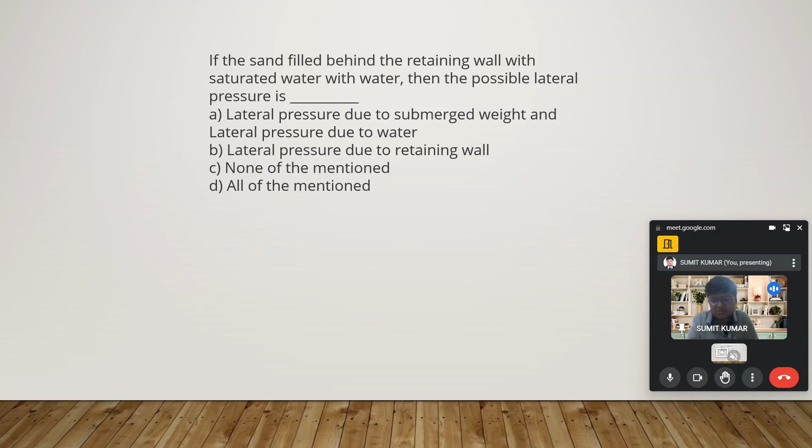Now the next problem: if the sand filled behind the retaining wall, basically the backfill, is saturated with water, then the possible lateral pressure is the lateral pressure due to submerged weight and the lateral pressure due to water, lateral pressure due to retaining wall, none of the mentioned above, or all of the mentioned above. My answer will be the lateral pressure due to submerged weight and lateral pressure due to water, because the water has been put over the entire surface, so it is in submerged condition, and the water is also there.

So we will add that as well, because we will solve those problems again and again to a greater extent, so we will get a better understanding of those facts.

Now the explanation has been given over here in detail. This lateral earth pressure is made up of two components of the weighted soil in back of the retaining wall: the lateral pressure due to the submerged weight gamma of the soil, and the lateral pressure due to water. So this is the answer.

So the option A is going to be correct. Now, the earth pressure at rest exerted on the retaining wall or retaining structure can be calculated using the theory of plasticity, theory of elasticity, Mohr theory of rupture, or none of the mentioned above.

Giving the answer of this problem is not very difficult, and it will be the theory of elasticity. So the earth pressure at rest resultant on the retaining structure can be calculated using the theory of elasticity. The explanation says that the earth pressure at rest exerted on the back of the rigid unyielding retaining structure can be calculated using the theory of elasticity only, as I told earlier.

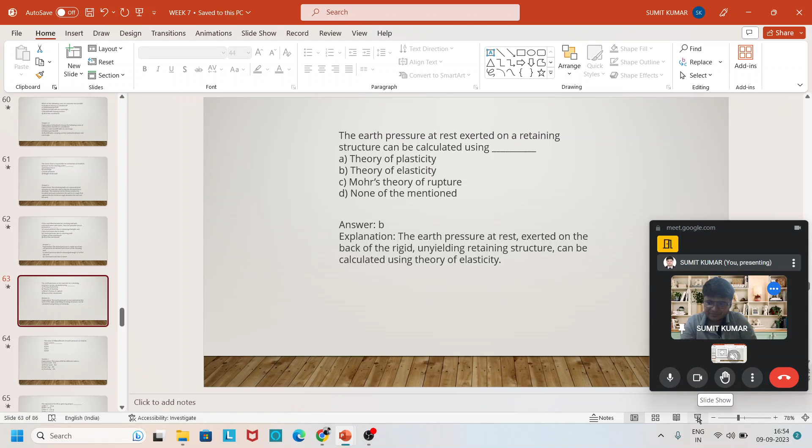Okay, now the next problem has been coming, so we will see this problem surely. The problem says the value of K naught, coefficient of earth pressure at rest, for the loose sand is?

So we have seen a table, we have drawn one section in a slide. Over there we have loose sand, dense sand, and different types of soil conditions given, and for that the Poisson ratio has been represented.

If we know the value of Poisson ratio from that table, we will answer this problem. But at this point of time, I will tell you for the loose sand the value of K naught is going to be 0.4. But when you go across these slides which I have drawn today, you will easily understand what will be the value of K naught.

Okay, now the next problem: the expression of K naught has been given by Jacky. Jacky gave the expression in 1944 for the earth pressure at rest condition, and that is K naught equal to 1 minus sine phi. So the solution for our question is option number A only.

I don't need to explain this because it has come three times in our slides already. If you've been following, you will easily understand. So option A is the correct answer. It was given in 1944, exactly as I remembered.

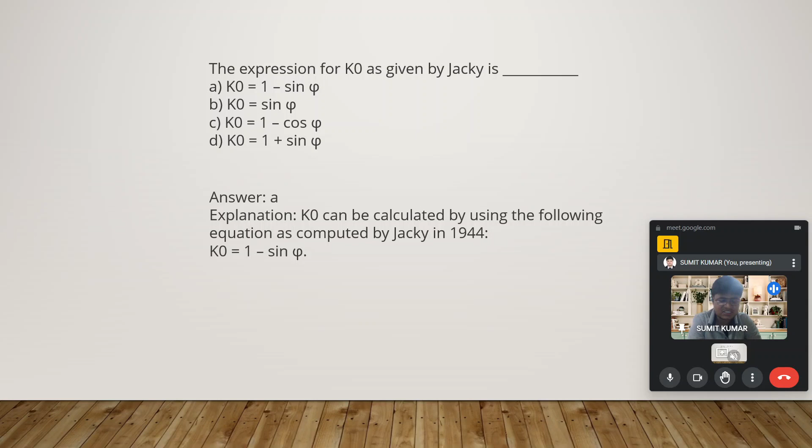So you need to discuss those things, you need to understand them well in order to go ahead with the problems we are dealing with here. Okay, I think up to this there will be no problem, so we will move to the next problem.

So the next question is very good. This question asks what will be the coefficient of earth pressure at rest for the rigid retaining wall if the backfill consists of cohesionless soil having phi equal to 26 degrees. So it is talking about the earth pressure at rest coefficient, so we know 1 minus sine phi will give the answer, so you can calculate 1 minus sine 26.

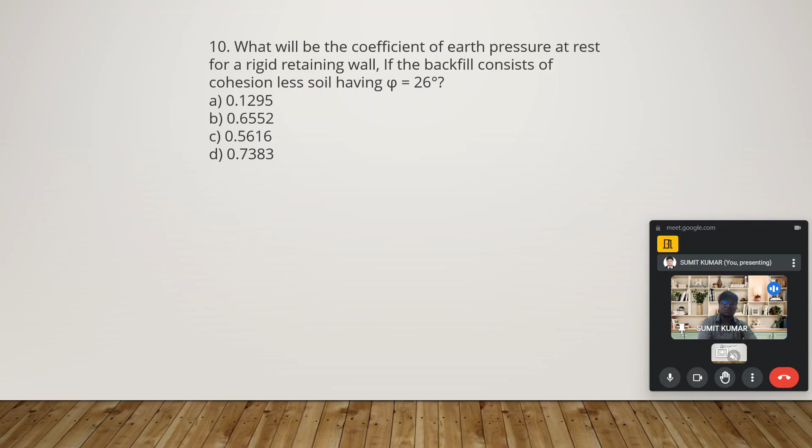The solution will be option number C. You can see in the explanation we used the interrelation proposed by Jacky as K naught equal to 1 minus sine phi, and K naught equal to 1 minus sine 26 is K naught equal to 1 minus 0.4383. So our answer will be 0.5616, and option number C is the correct answer.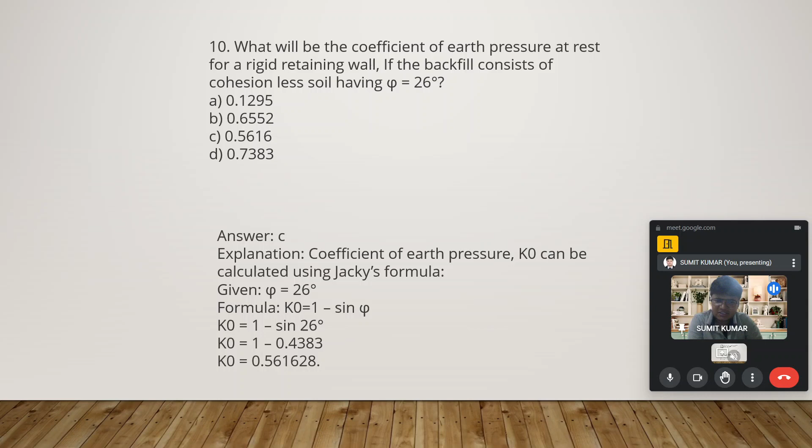Okay, up to this it will be okay. I am not marking any point in this slide, so when you go across you can take a printout of this or any way, and you can cover the answers and go with the problems. Some more problems are there for you, and these are very easy, very small problems.

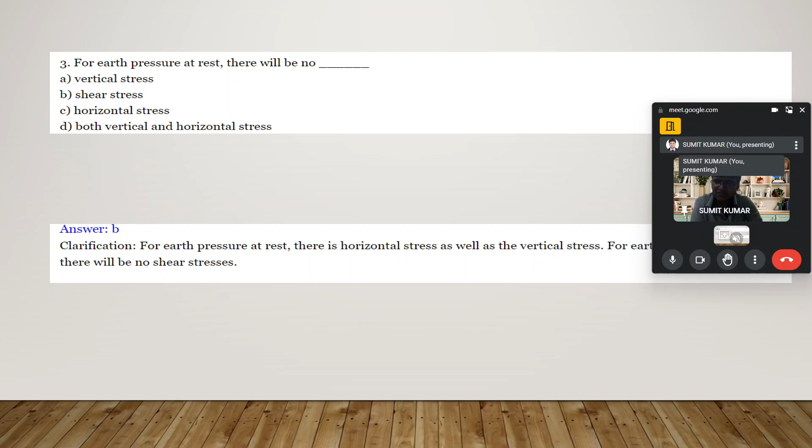This should be clear for everyone. There's no need to worry about those aspects. Now we will move to the next problem.

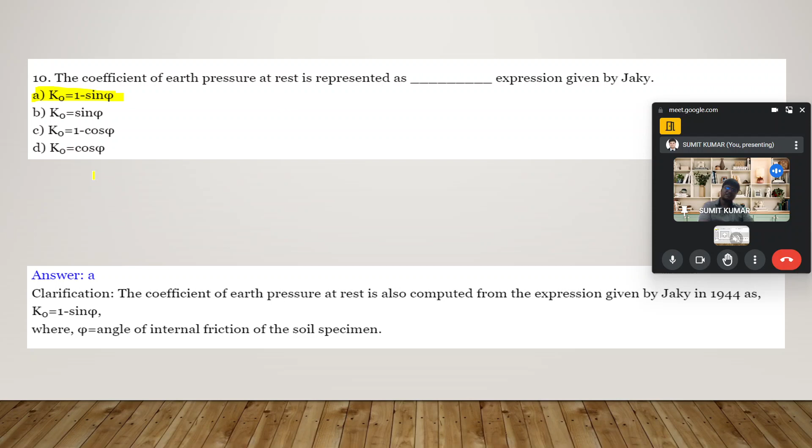Now, the coefficient of earth pressure at rest is represented by Jaky's formula, that is 1 minus sin phi. It has been asked many times, so I think this will be clear for one and all. The coefficient of earth pressure at rest is also computed by Jaky as this, and it is also represented in terms of plasticity index. There is integration already given to you.

Now this will be the last problem. For the cohesionless soil, the angle of internal friction is 45 degrees. Find the value of K naught. We already know the value is 1 minus sin phi, so that has been calculated. 0.293 will be the answer. So solve this problem with your calculator and write the answer.

Okay, we have one more problem. Let me see how many problems are left with us. Very, very few problems are left, so I'll cover that.

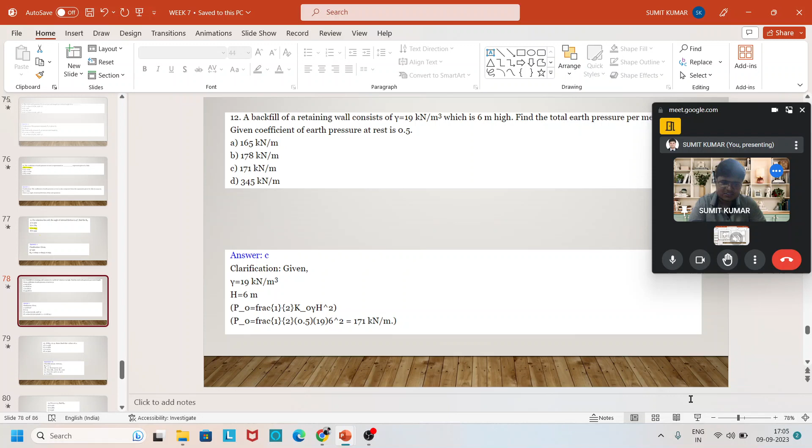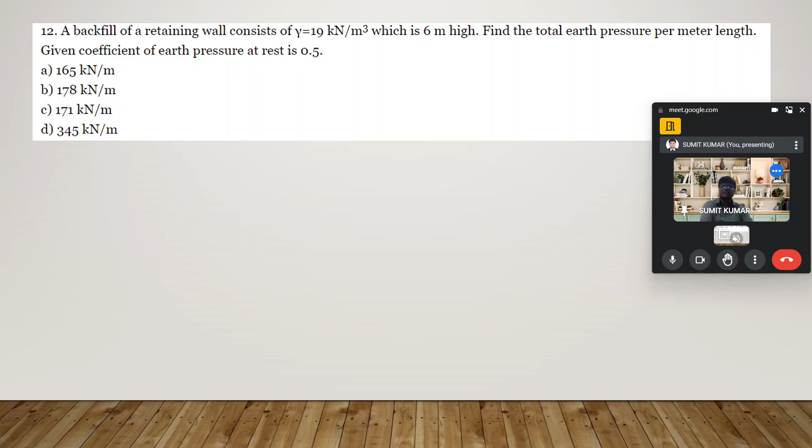The backfill of the retaining wall consists of gamma as 19 kilonewton per meter cube and 6 meter high. Find the total earth pressure per meter length. Given the coefficient of earth pressure as 0.5, 1 by 2 K gamma H square is applicable. See, 1 by 2 K gamma H square, the answer will be this.

This thing has been represented in the slides as 1 by 2 K gamma H square. So this is H, and the gamma is there already, and K value is this. So when we solve this, you will get the answer as 171. Solve it with your hand, there is no problem with that.

Now if there is another question: if the value of K naught is 0.4, find the value of mu. Use the relation the same way: K naught equal to mu by 1 minus mu. Solve this problem and get the solution.

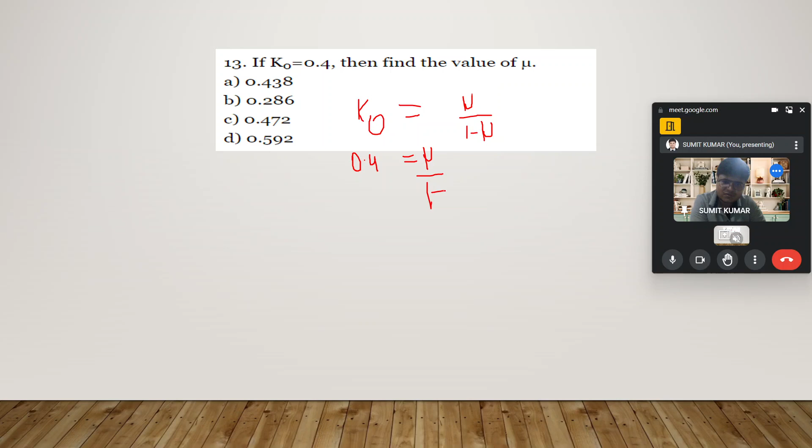This is a very easy, simple problem. Take it: 0.4 equal to mu by 1 minus mu, and solve this problem. You will get the value as 0.286.

Simple problem: 1 by mu minus 1 equal to 1 by 0.4. This implies mu is equal to 0.286.

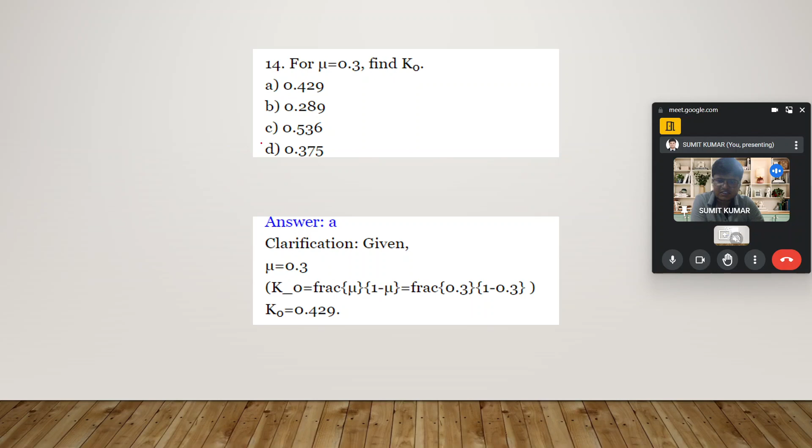Okay, clear? Now the problem: mu equal to 0.3, find the value of K naught. So the interrelation is already there in the last slide. Solve this problem, the answer will be going to be 0.429.

The last problem is like a backfill of retaining wall, gamma is 19, and this problem is already solved, so this solution has been given. This is the foundation, a very interesting question.

So up to this only is the content for today. Today we have understood the Earth pressure at rest condition and its theory. We already showed the Coulomb-based theory. We have understood the Earth pressure at rest condition, Earth pressure in active state, Earth pressure in passive state, and many more aspects which could be applicable.

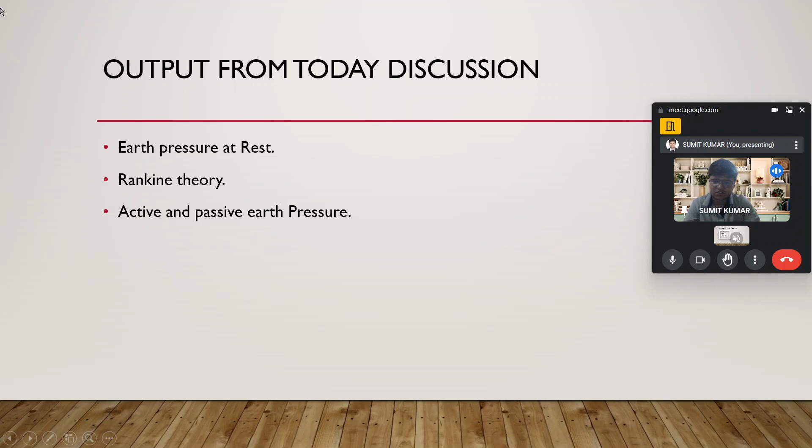We have solved some of the problems, so you need to go across those problems in order to get a better understanding of the topic. Apart from that, I will suggest writing with your hand what is Rankine's theory, what are the assumptions of Rankine's theory, what is Coulomb's theory, what are the assumptions of Coulomb's theory, and what are the limitations of Rankine's theory that could be turned into assumptions in your own mind.

You don't need to go across the textbook for writing those things. Write in your own words what you have understood from today's discussion, and solve some problems on today's topic. The simple problems I have discussed at the end are very easy. Try to solve some problems from the textbook, and afterward we will discuss some very good problems in the next class.